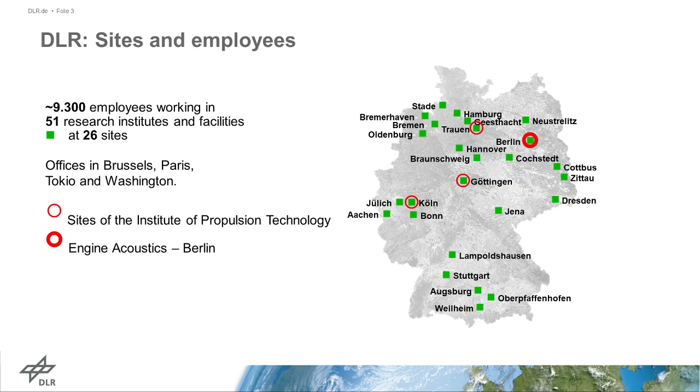So the Engine Acoustics department in Berlin is part of the Institute of Propulsion Technology, which is situated in Cologne and has affiliates in Göttingen as well as in Trauen. The Engine Acoustics department, which I have the honor to head, has the following core competencies. We are dealing with turbomachinery sound sources, the engine core sound sources, jet noise, unsteady aerodynamics of the turbomachinery as a whole. So if we understand the sources, we go to the propagation.

In the second row of this, so to speak, matrix, we see sound propagation in ducts, sound radiation, sound source localization, and sound absorption and liner. That's what we are also working on. And in the last row, we have active flow and noise control, acoustic pre-design, and of course we are operating experimental facilities, and we are using methods and tools.

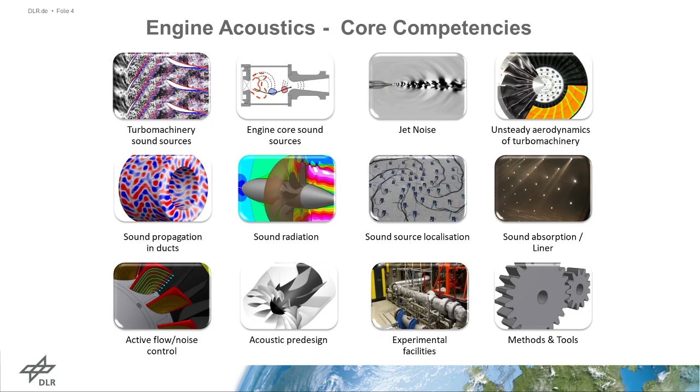The first example of our research work I brought with me is a new test stand that we call CRAFT. CRAFT stands for Counter-Rotating Acoustic Fan Test Rig. The concept and setup of the new test rig is as follows. It is scaled, could be 1 to 2 or 1 to 3, and it's a highly flexible laboratory test rig with low operating costs for experimental investigations on aerodynamics and aeroacoustics.

It is easily adjustable, has a lot of different parameters that can be changed, like the axial distance between the rotors or between the rotor and the stator. It has, as you can see on the picture on the right hand side, a long cantilever hub, which is about 1.5 rotor diameters long. The rotor diameter is half a meter, so this cantilever is 0.75 meters long, roundabout. And this is useful for undisturbed aerodynamic and acoustic measurements behind the stage.

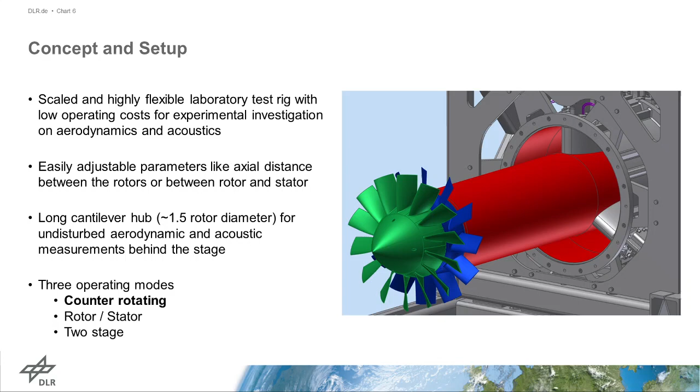The stage here on this picture is depicted without the shroud. So there is a shroud usually, and you will see this on the photograph in a second. We have three operating modes: counter-rotating, which is on this very picture here. So the first rotor rotates clockwise, the second rotor anti-clockwise. Then we have the flexibility to change into rotor-stator mode, where only the first rotor is rotating, and the second row is then not a rotor but a stator. And of course, two stages are also possible, where we have two rotors in a row and both turning in the same direction.

Technical parameters. The shaft speed is up to 4,500 rotations per minute. The shaft power is provided by two electric motors. Each has power consumption of 25 kilowatts. The relative tip Mach number is 0.33, so it's rather low speed. The rotor diameter is, as I said, a little bit lower than half a meter, 45 centimeters roughly speaking. The tip clearance of the blades is 0.6 millimeters. And the Reynolds number that you can calculate by means of the blade tip, so the speed at the outer part of the rotating tip, is 580,000.

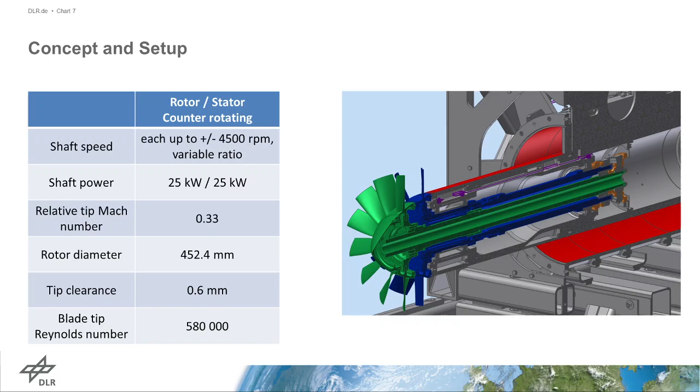This is another graphical display of the whole setup. The flow is coming from the left, goes through an inlet control device, which I will show you a picture of in a minute, and then goes into the inlet, which we can equip with a lot of different aerodynamic and aeroacoustic measurement technique. Then we have the rotor, either one rotor or two rotors, the long cantilever hub, and then on the pressure side, a lot of different possibilities to have a measurement technique, and the whole setup is finalized in the very end with a throttle which changes the operating condition.

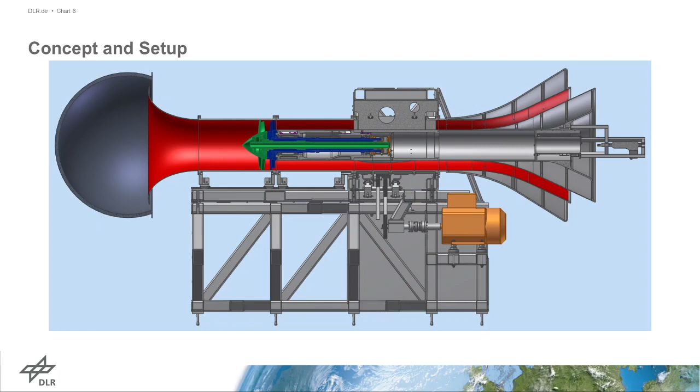Here you see the photographic impressions of the rig. On the left hand side, the picture shows the inlet control device, which is an in-house design and build. So it's still not 100% ready, but we are still working on it, but it should be ready for our first run, which will take place in 3 weeks' time.

In the middle you see the picture of the whole setup with the inlet control device dismantled, unmounted, so you can see the inlet. And on the right hand side you see the rotor stator configuration installed, and this is the front view on the rotor.

Research topics that we are planning to start in the very near future are firstly the influence of inlet distortions on fan noise. So we will place several means of inlet distortions in the front of the rotor, and then see how the acoustic and aerodynamic field will change. Secondly, we plan to do 3D shape optimizations for low noise design. This will be with the focus on tonal as well as broadband noise.

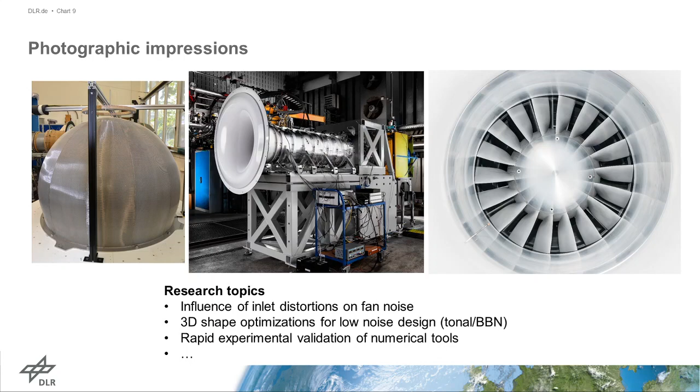And finally, the third idea we have so far in our head is rapid experimental validation of numerical tools. This is possible with this very flexible design here, where we can exchange rotors and stators quite quickly. Many other ideas are possible to be realized in this very setup here. So, we are very happy to take this rig into service in the next months.

The second example of our research work is a design to noise approach on fan noise. We are operating different means of the calculation of noise, analytical and numerical. This is a kind of cascade approach. So we start off with the very simple method we call 1D mean line method, where we take the aerodynamic input data from the mean line. Just a few input values are necessary, and by means of an analytical approach we can perform trend studies.

The second approach is a 2D through-flow approach, where the aerodynamic input data is taken from several flow streamlines. There we couple our aeroacoustic tool with the pre-design tool of the sister department in the Institute of Propulsion Technology, which is called GTLab. We base our aeroacoustic and aerodynamic predictions on the pre-design of the engine.

Then we have the 3D RANS mode, where we take the input data from stationary flow simulations. There it is possible to take into account realistic geometry and flow boundary conditions, and it is relatively low cost in comparison to unsteady or scale resolving simulation approaches.

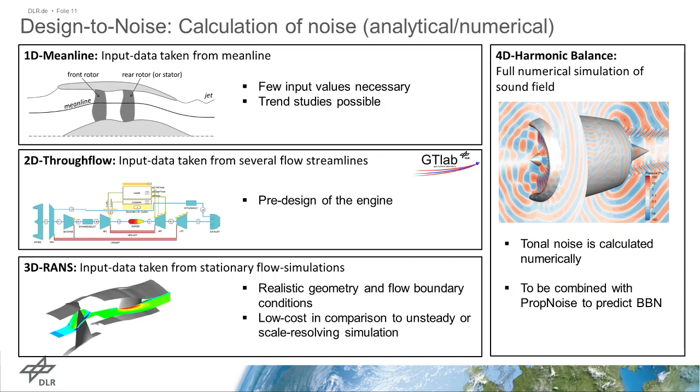And last but not least, the method we call 4D harmonic balance, where we perform full numerical simulations of the whole sound field by means of a URANS approach, using the harmonic balance method in our in-house DLR turbomachinery simulation called TRACE. By means of this technique, the tonal noise is calculated numerically, and this can be combined with our acoustic prediction tool called PropNoise, to predict broadband noise as well.

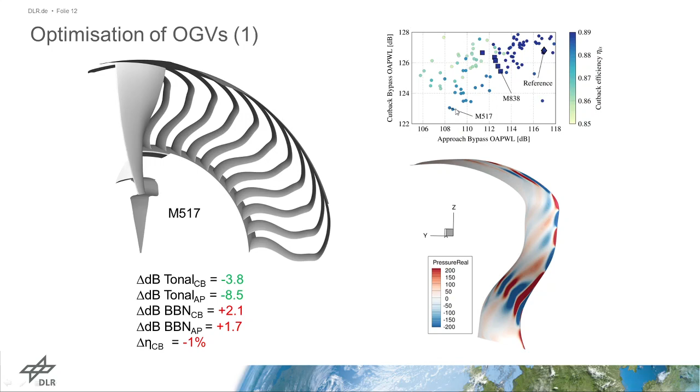Not so good is that the other tool for the broadband noise simulation predicts a penalty for broadband noise. We get plus 2.1 dB for cutback and plus 1.7 dB for approach. Moreover, the efficiency goes down by 1%. But for tonal noise, this shape here, and this is just one of several different optimization results you can see here. The member 517 was chosen here, and this member has a very funny shape and delivers reduced tonal noise.

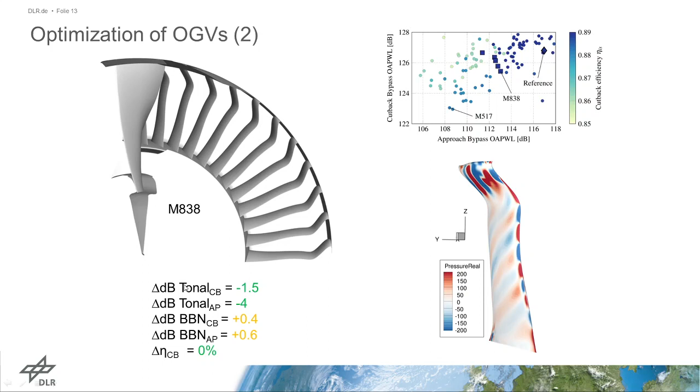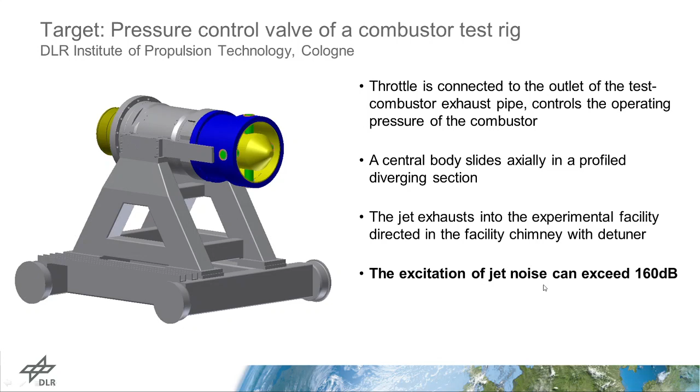The jet exhausts, on the other hand, in this direction here, into the experimental facility, which is a big, huge room, and is afterwards directed into the facility chimney with a detuner. Depending on the operating pressure of the combustor, the excitation of jet noise can exceed 160 decibels, which is enormous. To reduce this high decibel value, we invented a pressure control valve silencer for the combustor test rig.

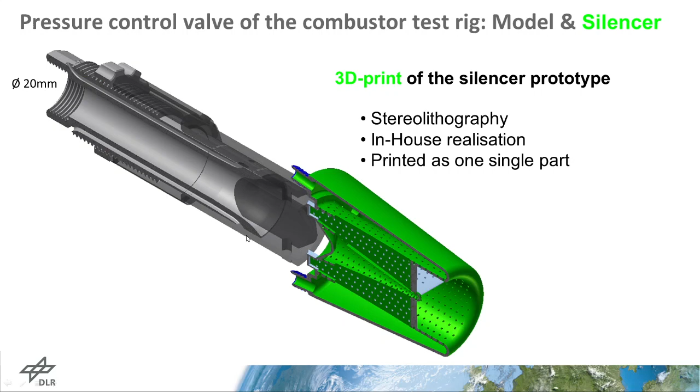This is a 3D model, a small scale model. The scale is in the order of 1/20. The advantage of this is we can use a 3D printer to print a silencer prototype. This we do by means of stereolithography. It's an in-house realization, and the whole green part here is printed as one single part. And you see here on the left hand side, the gray part is a 1/20 model of the throttle that you saw in full scale on the last page.

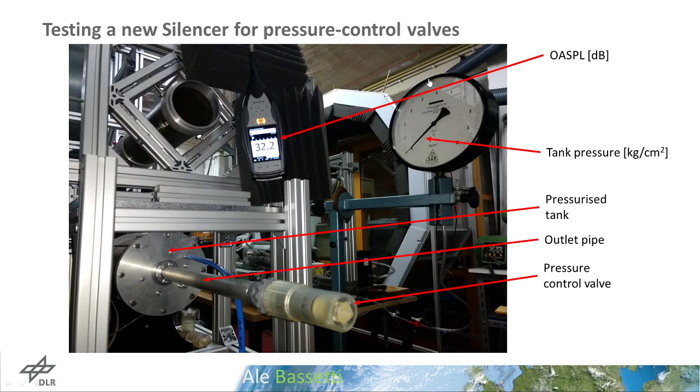This is the lab where we tested the valve, the throttle, the pressure control valve, and last but not least the silencer. So we tested the new silencer for pressure control valves. Here you just see the model of the valve, and this is a pressurized tank which we can pressurize up to a certain limit. This sound meter measures the overall sound pressure level in this test room here, and on the next picture you see the result of this approach.

We are still developing this model. We are planning to develop it further. We will change some parameters like the density of the holes here and change the shape slightly, and we plan to investigate a half-scale model in the beginning of next year, and at the end of next year we would like to operate a full-scale model of this silencer.

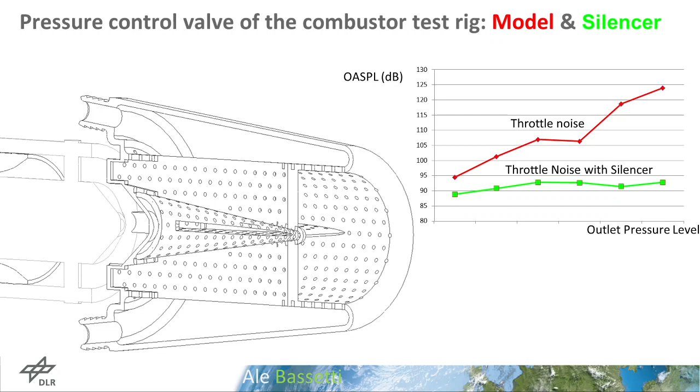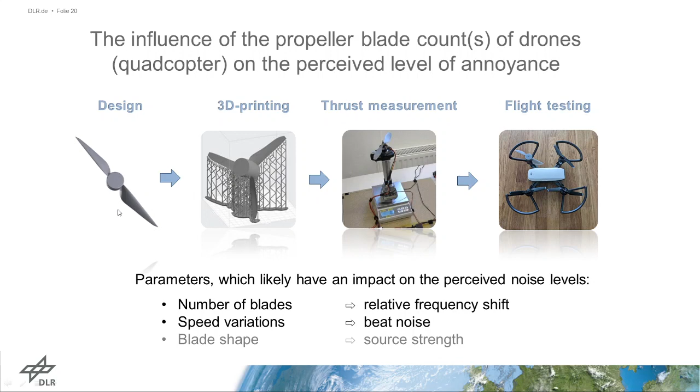So the number of blades can provide a relative frequency shift, and the speed variations of the drone controller of course lead to beat noise, and this also changes when you change the individual number of blades. Moreover, this is nothing we concentrate on now, but may in future, is to optimize the blade shape so that the source strengths will get down. This ends my little presentation.